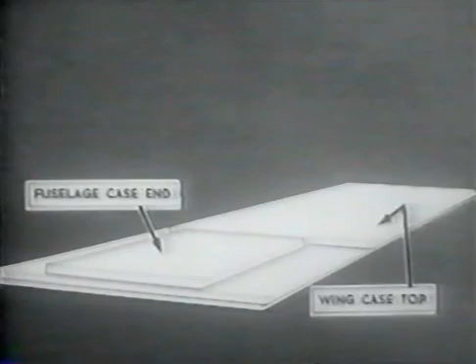The finished platform looks like this. And here it is in diagram. Let's see how it's built. Here are the two fuselage case sides nailed together to form the base of the platform. Now comes the end of the fuselage case and the top of the wing case. Then comes a side from the wing case. And on the same level, a fuselage end.

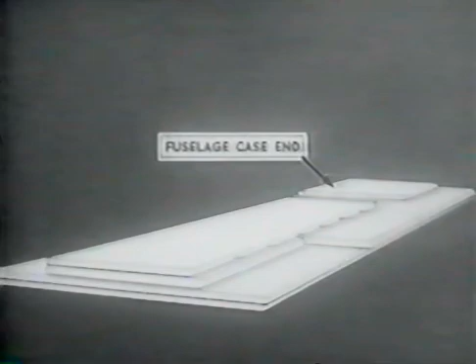The remaining wing case side and the two ends from the wing case are laid on top and nailed in place. This leaves a space toward the back of the platform, which is built up by nailing together three 2x4s taken from the wing case stringers and laying them lengthwise like this. The top of the fuselage case becomes the top layer of the platform. A diagram similar to this is reproduced in the instruction manual and should be followed in detail when the platform is being constructed.

At this point, the crew chief is ready to direct the transfer of the fuselage onto the platform. If the level of the trailer bearing the fuselage is higher than the platform you have built, wheel pits of sufficient depth should be dug to bring trailer and platform to very nearly the same level. The truck bearing the fuselage is slowly and carefully backed up, keeping it always in exact line with the platform.

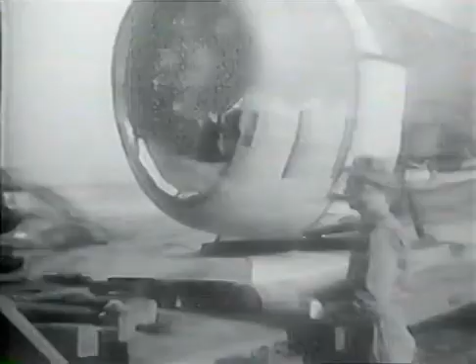The prime mover is disconnected. A tow line is fastened around the entire bottom of the fuselage case. And by using the prime mover, the bottom of the case with the fuselage itself is eased squarely off the trailer and onto the assembly platform. Steady. Steady there. Just a bit more. Pull it right to the edge.

Okay. Now, exactly at the back end of the shipping brace, the 10-inch section of floorboard is removed from the fuselage case bottom. Then a 10-inch section is cut out of the exposed 4x6 beams on each side. These cutaway sections, like the slot in the base of the platform, are important later in assembly.

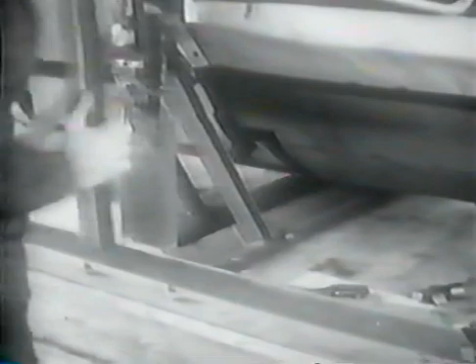It is also necessary that the rear members of the shipping brace be removed. These members have been bolted and lightly welded in place. The bolts are removed and the weld is broken. That concludes the construction work. The crew chief can now begin to direct the actual airplane assembly.

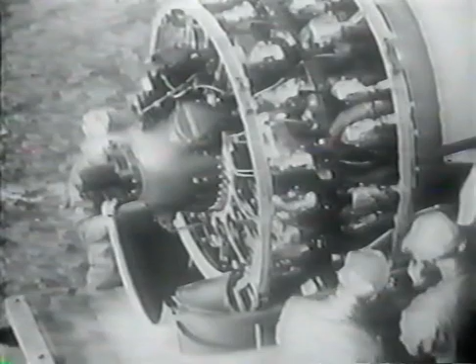First, the engine cowling is taken off. This goes quickly if at least 4 men are assigned to the job. Now the engine must be cleaned. Kerosene or other suitable solvent may be used in removing the anti-corrosion compound sprayed over the engine before shipment. The carburetor and lower cylinders should be drained of any oil or moisture which may have accumulated.

Also, the spark plugs and connecting harness must be installed. These procedures should be done in accordance with instructions found in Technical Order number 02-1-1. While this is being done, the protective tape and other coverings are taken off to expose all openings and fittings of the fuselage, wings, and all other parts. After complete inspection of the work that has been done on the engine, the cowling may be replaced.

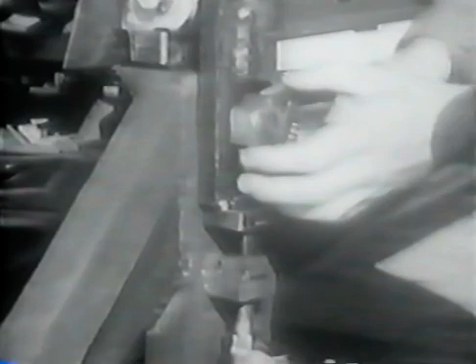During shipment, steel braces have supported the weight of the airplane. The braces are connected to these wing hinge or pin connections. The weight must be released and transferred to these steel resting pads. This is accomplished by turning up the jack screw just 2 or 3 turns. This is enough to relieve tension on the master bolt. Then, the master bolt, which has actually carried the full weight of the plane, can easily be removed.

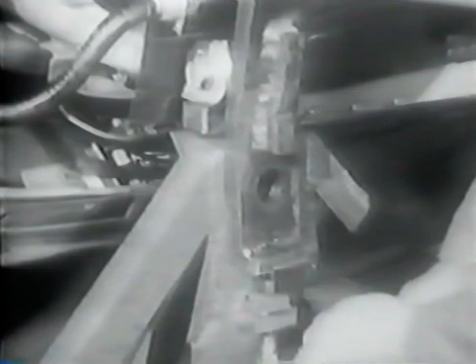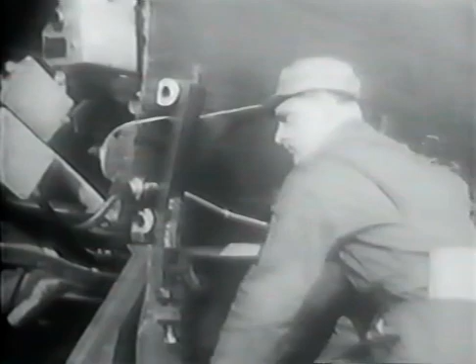The direction of the jack screw is then reversed. It is turned down until the weight settles on the steel resting pads. Now the hinge bracket may be removed. The hinge is then free and clear, and ready to receive the wing.

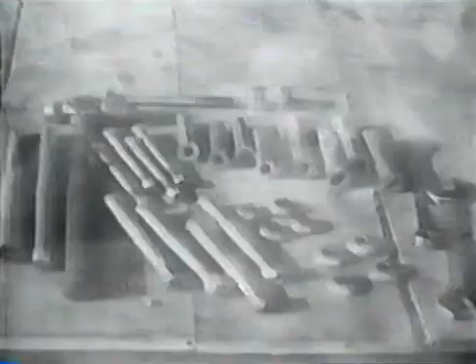To prepare for the wing assembly, we remove the pilot's seat to provide more working space in the cockpit. Now, caution. Both aileron control rods must be inserted now, flush with the fuselage. It will be too late after the wing is on. The crew chief checks to be sure that all wing connection drift pins, bushings, bolts, and tools are ready and on hand. When he's sure that everything is in its place, he can start to direct the actual wing assembly.

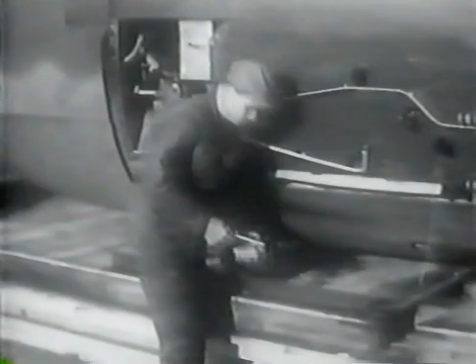Both upper and lower wing and fuselage hinges are secured in the same manner. They are lined up with the aid of drift pins. When the hinges are in perfect alignment, the bushings are installed, always with the split side upward. A bushing inserter is used to drive the bushings through the hinges. The drift pin is forced out as the bushing is driven home.

When all the bushings are in place, the men can ease off a few at a time so that the support they have been giving the wing will be released gradually. Next, the tapered bolts are inserted. The heads of these bolts should always be facing each other, pointing toward the inside of the wings.

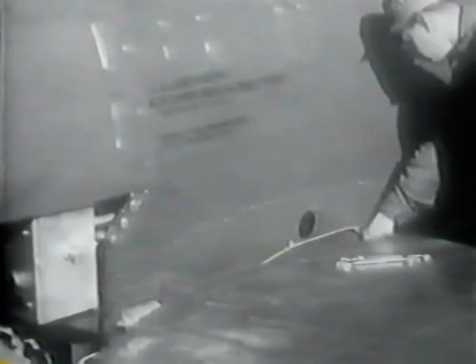Once both wings are on, we are ready to make all wing root connections, except for the cables and control rods. This requires a thorough understanding of the connections to be made and their location. Since these connections are in very tight quarters, let's look at an animated diagram.

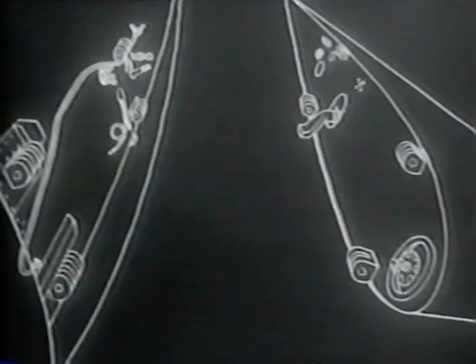Here are the connections to be made at the left wing root. The fuselage is here, and the wing root here. Here are the connections which are found in both wings. The flap hydraulic lines, the cannon plug, the aileron control rod, the landing gear and brake hydraulic lines, the uplock cables, and the gun heater tube.

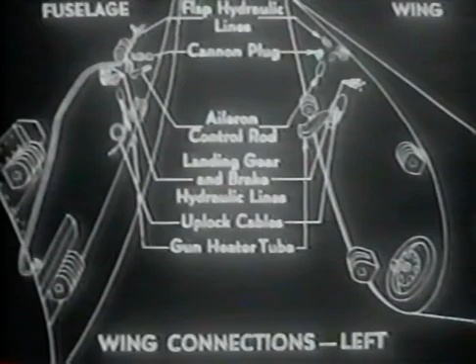Now let's see the connections found only at the left wing root. They are the aileron trim tab cables, the static and pitot airspeed lines, and the oxygen line. Here's the situation on the right wing. In addition to the connections you see here, which are common to both wings, we have the fuel vent and the cockpit air scoop.

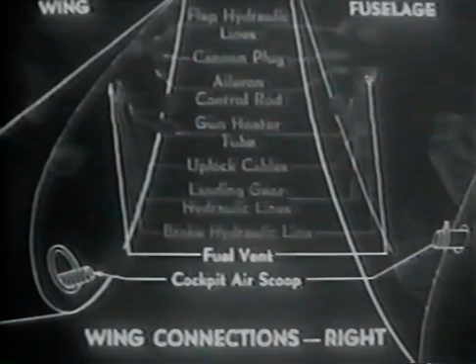Remember, at this point we make all connections except the control rod and cable connections, which should not be made until after the landing gear is down. In preparation for lowering the landing gear, a pit must be dug under each wing in line with the path that the wheels will take. This pit will have a maximum depth of about 1 foot at the point where the gear is fully extended.

To lower the gear, wires which were attached to the uplock cables for shipping purposes are pulled at the wing root. The gear will now extend. Here is the reason we cut out that section of the platform. It would have obstructed the passage of the wheel. Notice, too, that the pits are dug quite close to the platform.

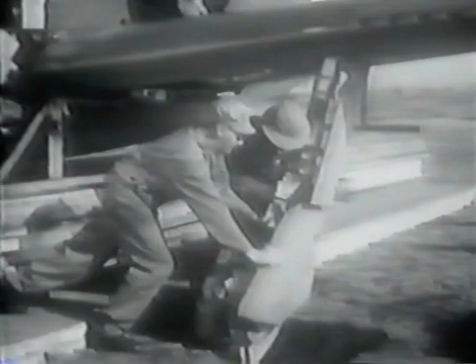In order to bring the gear down to the full downlock position, it is necessary for 2 men to get behind and push. When the downlock position is reached, an audible click is heard. With the necessary access holes now available, the uplock cables, the aileron control rods, and in the left wing, the aileron trim tab cables can be connected. Let's see what goes on inside that wing he's reaching into.

To connect the uplock cables, the ends of the cables from the fuselage are drawn into the wing. The short cable from the fuselage is connected to the long cable in the wing through this access hole. The long cable from the fuselage is connected to the short cable in the wing through this hole. These connections are made with the turnbuckles, which are drawn up to a tension of 25 to 30 pounds. On the back side of this spar is a micarta guide block, which we see here. The cables are threaded through this block.

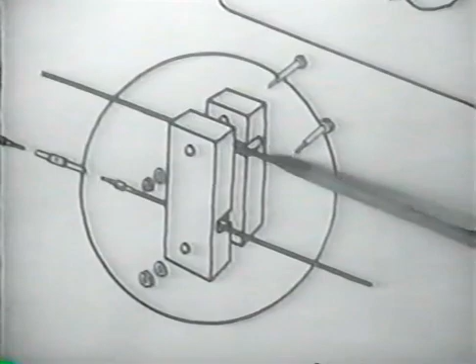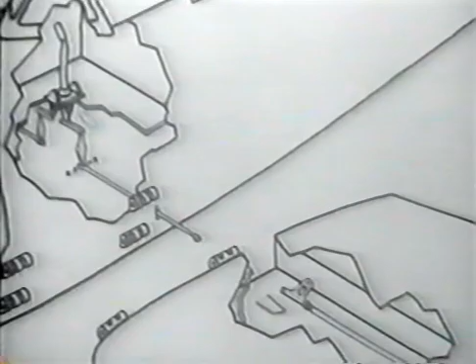Now, the aileron control rods. There's an access hole in the cockpit floor here. By reaching down through this hole, we can secure the rod with this bolt, washer, and elastic stop nut. In the wing, the same procedure is followed by reaching up through the access hole and making the bolt, washer, and nut connection. Here we see a closer view of both connections: the fuselage connection, and the wing connection.

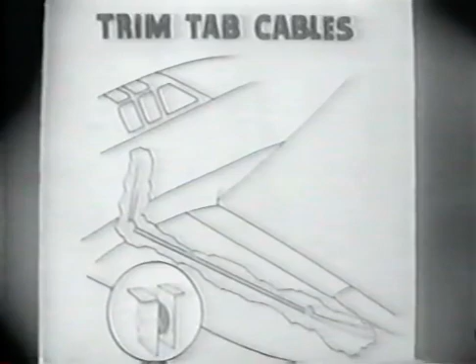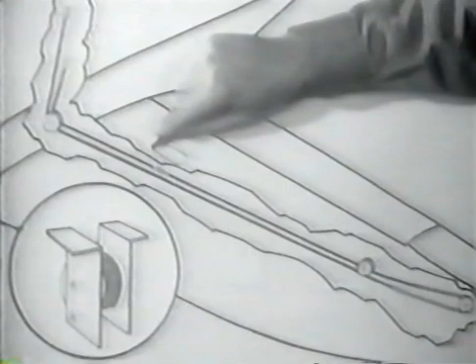The trim tab cables remain to be connected. Here is the left wing. Here are the cables running out through the wing. By reaching down through this access hole in the top of the wing, connection is made by means of a turnbuckle. Tracer wires attached to the ends of the cables aid in pulling the cables to the points of connection. The long cable, pulled through by tracer wire, is connected to the chain by reaching up through this access hole.

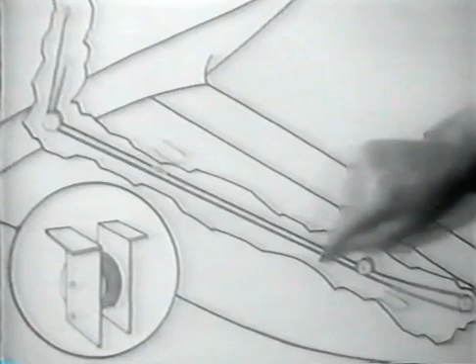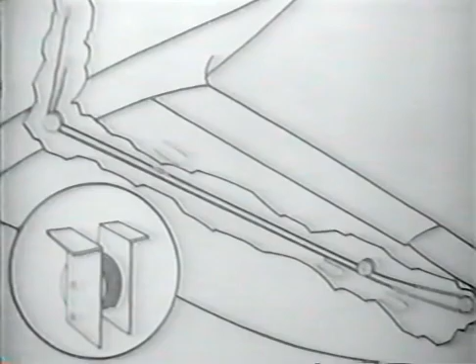At this opening, reach in and install the pulley guard with a clevis pin and cotter pin provided. Here is a closer view of the pulley guard, showing where the clevis pin is inserted. A safety wire, which has been fastened around the chain, is now removed, and the cable tension is adjusted to 35 pounds. With all wing connections now complete, the next step is to make preparations for checking out the operation of the landing gear.

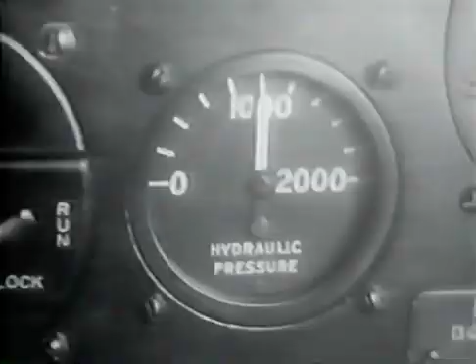First, we check the fluid in the hydraulic reservoir. Pressure is then built up in the hydraulic system by using the hand pump in the cockpit until the indicator shows 1,000 pounds. The flaps and brakes are now bled according to standard technical orders. 90 pounds pressure is pumped into the upper chambers of the shock struts, putting the gauge on the valve to the lower chambers.

Next, after making certain that all the switches in the cockpit are in the off position, the battery, which should be brought up to full charge, is installed. Then the crew chief is ready to direct the actual testing of the landing gear, which should be raised and lowered at least 3 times.

In the first retraction of the gear, the crew chief should check to see that the inner door and strut fairings fit smoothly in the wing.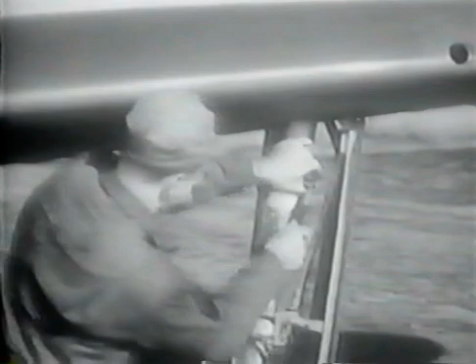We can get ready now to roll the plane off the platform. To do that, we must transfer the weight of the plane from the platform to the landing gear. First, the air must be released from the lower chambers of the shock struts. The landing gear must be fully compressed and held in this position while the pits are almost completely filled in and the earth packed hard under the wheels. Now the man in the cockpit should park the brakes.

The entire plane is then jacked up by pumping air into the lower chambers of the shock struts. To make the pumping job easier and to relieve strain on the pump, several men rock the plane by pushing up on the wing. The result is that the plane is lifted above the steel rest pads of the shipping brace.

Once the weight of the plane has been transferred to the landing gear, the two center skids behind the shipping case bracket are sawed through, and the front section of the fuselage platform with the supporting irons is pulled forward and clear. Now we are ready to release the tail from its shipping case brace. In preparation for this, air is pumped into the tail wheel strut until the piston is completely extended. The man in the cockpit locks the tail wheel to prevent it from turning sideways.

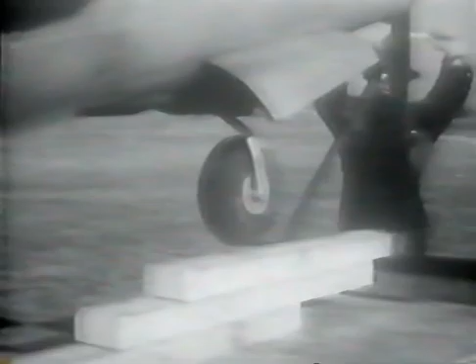We must build a track for the tail wheel to run on. To do this, we make use of one of the stringer sections formerly used to carry the wing. It is sawed into 3 equal lengths and laid directly under the tail wheel in the manner shown here. The other stringer section is placed under the empennage jack pad.

8 men now lift the tail slightly to ease the tension on the tail shipping brace bolt. When the bolt is removed, the tail is slowly lowered until the wheel rests on the tail track. The stringer we just used to lift the tail can now be sawed through the middle, and the 2 sections placed in front of the platform to form a tail wheel ramp.

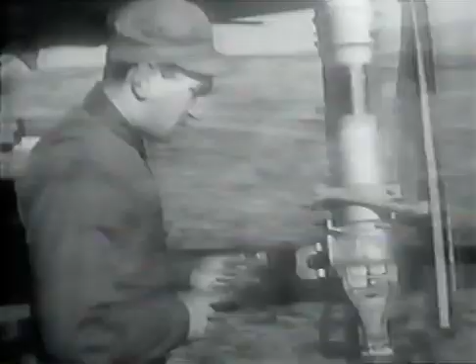The tow lines are made ready and fastened to the towing hole. Stop, not there. That's the uplock hook. Use the hole that's marked for towing.

A jeep is mighty handy in pulling the plane away from the platform, but manpower can do the job if necessary. The short sections of tail track are moved progressively as the tail wheel rolls forward. During this roll-away operation, the man in the cockpit keeps a slight tension on the brakes to ensure slow, even movement of the plane. Here she comes down the ramp, looking more like a P-47 every minute.

Now is the time for pre-flight adjustments and inspections of the landing gear shock struts. First, all of the air is released from the lower chambers to allow the strut pistons to be fully bottomed. Next, we remove the plug on the lower chamber to see if it contains the proper amount of fluid. If there is sufficient fluid in the cylinder, it will be found level with the plug opening.

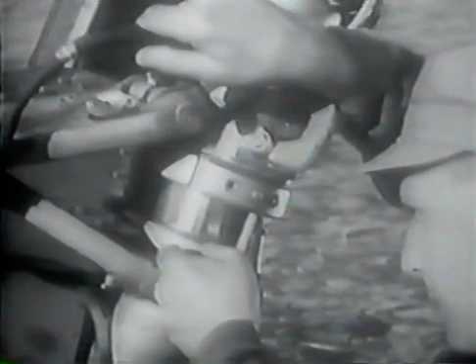Now the strut chambers are checked for proper pressures. 90 pounds is correct for the upper, and 360 pounds for the lower chambers. With these pressures, the clearance between the bottoms of the lower chambers and the ends of the pistons should be 1 5/8 inches. To make certain that there has been no leakage in the transfer valve, the gauge is put on the upper chamber and checked again to see if it reads 90 pounds.

We're moving right along now, and we're ready for installation of the tail feathers. The fin and horizontal stabilizer are treated as a sub-assembly, which is installed by means of 10 bolts here and here, and 4 bolts in the rear bulkhead here and here. When this is done, the crew will be ready to string the control surface cables. There can be no confusion in stringing these cables because before shipping, each cable has been tagged to show where it goes.

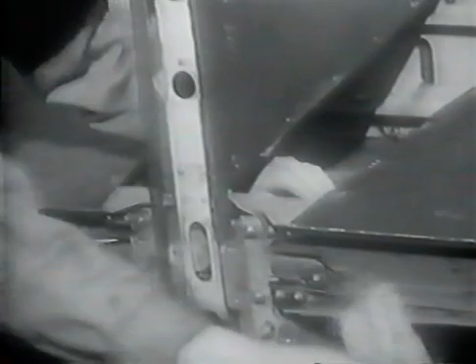After the cables have been strung, the pulleys are put in place. The elevator tab cables are connected, and the cover plates are put on. The same procedure is followed for the rudder trim tab cables. Now the trim box in the cockpit should be set in neutral.

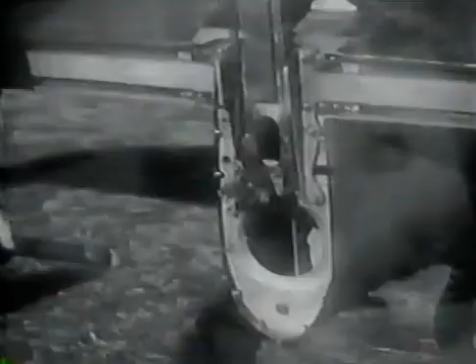The elevator control rod is placed in the tail and into position. The forward end is connected inside the fuselage. The elevator can now be installed. On each side, there are 2 stabilizer hinge fittings and 1 trim tab universal connection. The elevator control rod is connected to the elevator. The rudder is connected at the 2 pin hinges here and the rudder trim tab universal here.

The rudder cables are connected next. This can be done only after the man in the cockpit has put the control lock to on position in order to place the rudder in neutral. When all the cables, bonding, and rudder tail light have been properly connected and inspected by the crew chief, the assembly of the tail feathers is complete.

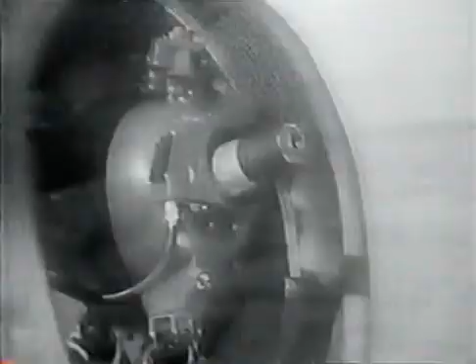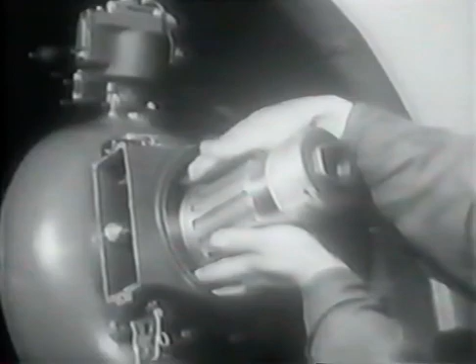The ship is now ready for the installation of the propeller. Here are the steps in preparing for propeller installation. The plane is nosed up to within about 2 feet of the platform, so the men will have something to stand on while they work. Your very first action is to remove this brush holder assembly, because the brushes would be snapped off if the propeller were put on with the brush holder in place. Out comes the inner cone. And don't forget the shim, which is right behind it.

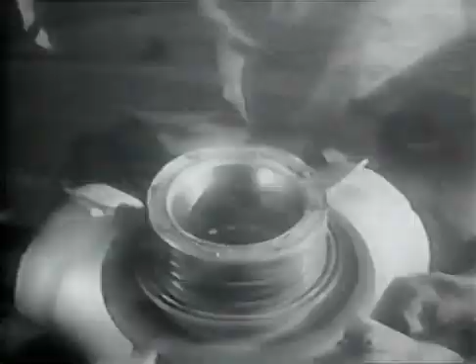The cone and shim must be thoroughly cleaned with a suitable solvent, and also the propeller shaft. The splines on the propeller shaft and also the cone and shim are then coated with a light oil. When this is done, the shim first and then the cone are replaced, making sure that the open portion of the cone is at the top. The propeller lock nut threads are coated with the prescribed mixture of castor oil and white lead. While the shaft is being made ready, the protective coating from the propeller itself can be removed. The splines on the inside of the propeller hub are cleaned and oiled, and the slip rings are wiped clean of any oil or dirt.

When both the shaft and the propeller are ready for assembly, the propeller is brought up to the plane. You need at least 10 men for this job. Under the guidance of the crew chief, the propeller is carefully placed on the shaft. The number 1 blade should be on top so that the splines will be readily engaged. Now the main propeller shaft nut is tightened with the 4-foot propeller bar. After the nut has been drawn tight, insert the locking sleeve and secure with the lock pin assembly.

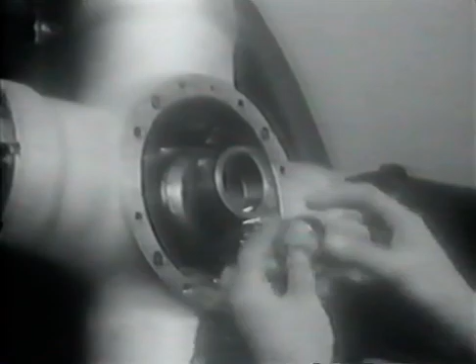Next, after cleaning, the brush assembly is put in place and the brushes checked for proper clearance on the slip rings using Prussian blue according to standard procedure. The propeller hub electric contact points are cleaned and made ready to receive the power unit. The power unit itself is removed from the case and cleaned with particular attention to cleaning around the contact points. Since the power unit is set in low pitch when packed, the blades on the propeller must be set in low pitch also.

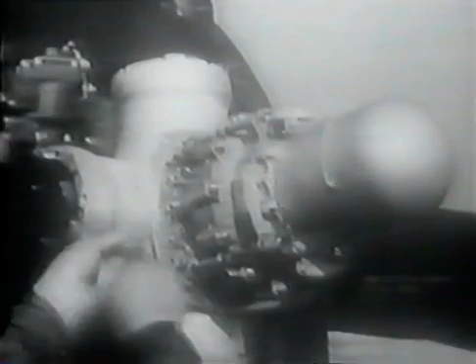When the power unit is installed, the 8 bolts are drawn up and secured with safety wire. The propeller gear housing is then greased and the speed-reducing gear housing is oiled. With the power unit cover or spinner installed, the propeller assembly is complete.

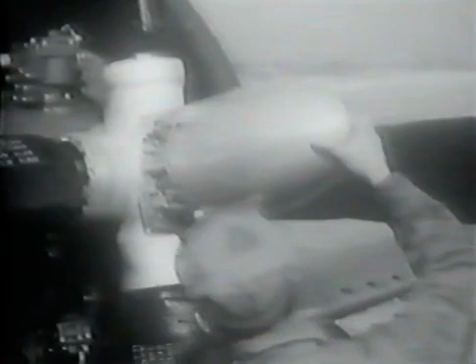Now, all of the major connections on the airplane have been made. After a thorough inspection by the crew chief, we install the fillets and secondary cowling. The pilot seat is returned to its place in the cockpit. And when the pitot tube, antenna wires, radio mast, and pilot's rear view mirror have been installed, the armorers are ready to take over, to install the guns and charge them.

The job of assembly is done. The plane is towed off to the airfield runway. Here, after the plane has been fueled, the crew chief runs up the engine and makes one final check on the operation of all instruments and movable surfaces.

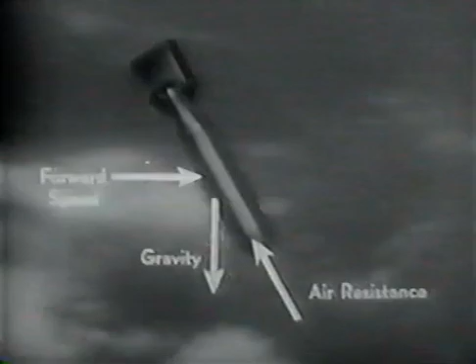These three major factors working together, forward speed, gravity, and air resistance, make it necessary to correct the aim to hit the target in range. So, in horizontal bombing, we must allow for the pull of gravity on the bomb, the speed of the airplane, and the effect of air resistance in finding the proper position for the release of the bomb. If we release too soon, our bombs will undershoot the target.

If we release too late, our bombs will overshoot the target. If we release at the right time, we hit the target. So far, we've been considering an airplane in level flight. Now let's put the airplane in a vertical dive over the target and see what happens.

The speed of the airplane, the pull of gravity, and air resistance are now working in the same direction. So, by aiming the airplane at the target, we have eliminated any need for correcting the range. The bomb will hit where we aim, whether we release early or late. This ability to hit by flying the airplane at the target and releasing the bomb whenever our aim is on is the foundation for dive bombing.

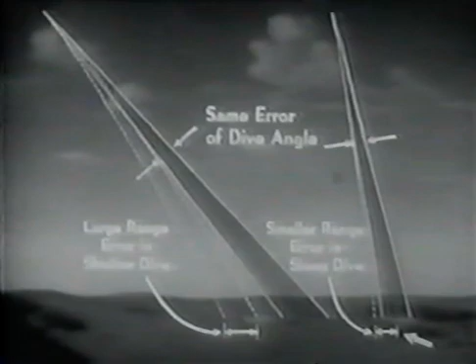Furthermore, the same amount of error in estimating our dive angle will cause a greater range error in a shallow dive than in a steep dive. In a shallow dive, the bomb falls much farther from our point of aim than it does in a steep dive. Estimating this range correction introduces an error. We have only the size of the target to help us estimate our corrections. In making large corrections, this leads to error. It is also much harder to estimate the dive angle of a shallow dive correctly, so that our expected error is still greater.

Let's make a dive on a windless day. If we reach release altitude at a normal dive angle with our line of sight on the target, the bomb will hit the target. Gravity causes the bomb to land short of the line of flight. The sight is bore-sighted, so the line of sight is below the line of flight. If this is done, the bomb will hit our point of aim when we release in a normal dive.

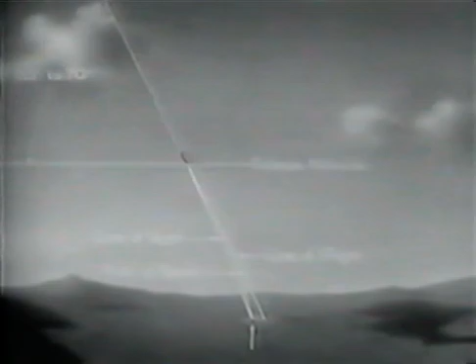If, however, we're diving the airplane toward the target and find that we're too shallow, we must change our line of flight or the bomb will fall short of the target. Of course, on nearing release altitude, we can pull up the nose, raising our line of flight. This corrects our bomb toward the target. But it does not change our vertical angle with respect to the target, as we change the line of flight almost instantly when we pull up the nose. This correction changes the bomb's path because the bomb is affected by the airplane motion, which is along the line of flight.

The bomb lands far short of our line of flight and the line of sight because of the large effect of gravity in a shallow dive. The range correction is so large that it cannot be estimated accurately. Let's see what happens if we steepen the same dive to the normal dive angle as soon as we see we're too shallow.

Now, although the bomb will land on the line of sight, it is far short of the target. As before, we can pull up the nose, raising our line of flight and line of sight over the target to correct for range. But now our vertical angle from the target is even less than before, and our range correction is still larger. We are worse off than we were to begin with.

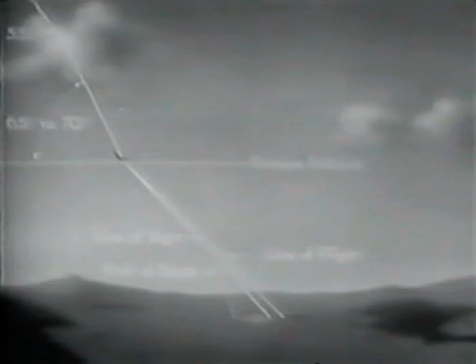Let's repeat the same dive and try to correct it once more. This time, we'll pull the nose up whenever we see we're too shallow. If we release our bomb with no correction, it would land even further short of both the line of flight and line of sight than it did in our original dive.

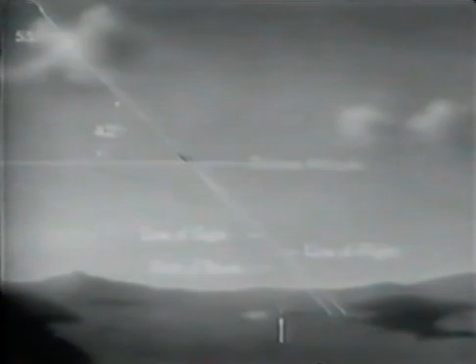But by diving shallower, we have raised our line of flight far over the target, so that the bomb will land over the target even though it's further short of the line of sight. However, our vertical angle from the target is now correct, and as we near release altitude, we correct our line of flight by pushing the nose over and putting our point of aim on the target. This correction puts us in a normal dive so that the bomb will land on the point of aim.

So, if we start a dive incorrectly, we can still release in a normal dive. If we find ourselves in a dive that's too shallow, we should raise the nose, steepening the vertical angle from the target in order to reach release altitude near the normal dive angle. The bomb will land so near the point of aim that range correction is easy to estimate.

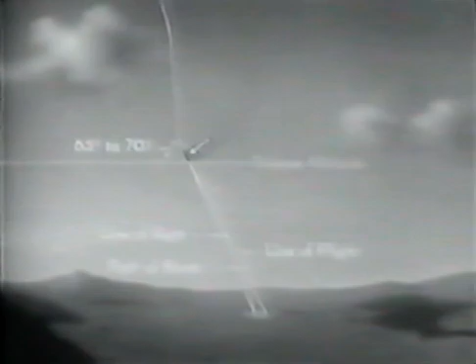On the other hand, if we find ourselves in a dive that's too steep, we should push the nose over to correct the vertical angle from the target and again reach release altitude so that when we make our range correction, we are in a normal dive.

Now that we've considered the problems of range, let's consider the problem of deflection. We must keep the bomb from falling to either side of the target, as seen by the pilot. We correct for deflection by turning the airplane right or left toward the target, because we must correct the line of flight of the airplane. Assume that the airplane is in a shallow dive. A small amount of turn will correct a large error in deflection.

Now let's aim the airplane at the ground in a steep dive. We see that to make even a small correction in deflection, the airplane must be rotated almost 90 degrees. Turning an airplane in a steep dive is difficult. If we apply much rudder in a steep dive, the airplane skids instead of turning.

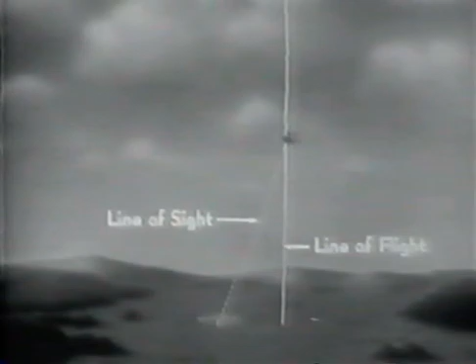A skid like this may skid the airplane just enough to point the line of sight directly on the point of aim. Because we can hold the line of sight on the point of aim, we get the false impression that the airplane is diving toward the point of aim. This is an illusion, because even the heaviest skid gives the airplane very little horizontal motion in a dive. Because of this, it's important for us to remember that in a steep dive, we turn the airplane with much more aileron than rudder, like this.

We have seen that it's easier to correct for range in a steep dive and for deflection in a shallow dive. We can't do both at the same time. The only thing we can do is compromise and make our dive somewhere between the steep and the shallow dive. Such a compromised dive is called the normal dive, in which we release our bomb in a dive angle of about 65 degrees. The normal dive starts shallow enough so that deflection can be corrected with a relatively small turn.

The normal dive angle ends steeply enough so that corrections for range are easily estimated. Experience has shown that a dive near this angle is best for bombing targets when we have to concentrate on both range and deflection.

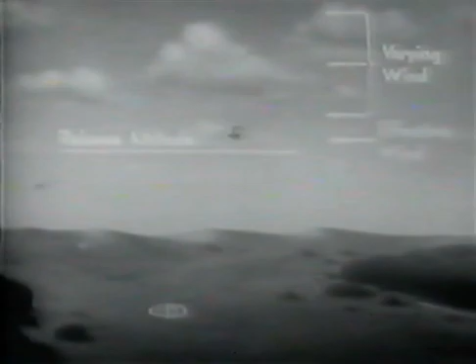Therefore, we must allow for the drift of the airplane before release altitude, plus the drift of the bomb after release, in order to make a hit. If the wind with which we're drifting during the dive remains constant, it is the effective wind. If the wind with which we're drifting during the dive varies, the wind drifting us at release altitude is the effective wind, since this is the wind drifting the bomb as it falls. We'll see in a later film that the wind about 500 feet above release altitude is the effective wind.

With knowledge of the effective wind, the wind affecting the airplane at release altitude, we'll be able to select our tentative point of aim on a stationary target far enough upwind from the target to allow for the bomb's drift after release. We must also allow for the drift during the dive. If we fail to allow for this drift, we must continually turn to keep on the tentative point of aim. In moderate winds, the turn is so sharp that it becomes difficult. In strong winds, it's impossible.

So we select a pushover aiming area far enough up the winds through which we dive to allow for the drift to the tentative point of aim. We push over on that area. As we dive, the moving point of aim travels toward the tentative point of aim. We can easily make small corrections in our dive up to the point of release. So by the time we reach release altitude, we should be aimed in deflection at the tentative point of aim. Just before reaching release altitude, we go to our sight and correct our aim in range. This final correction gives us our release point of aim.

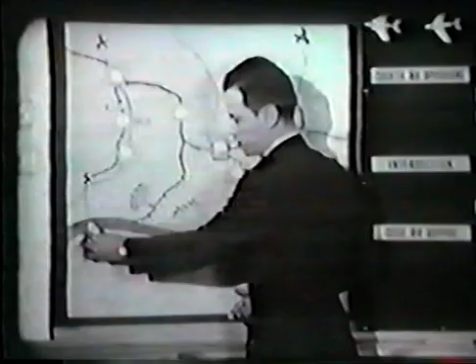Sir, I'm Major McManus. With the detailed coordination required in close air support operations, how is the ground fire coordinated with the airstrike? A good question. Close air support strikes are performed under the direction of a forward air controller. He observes the strike from his position in the front line area. This man has communication with both the flight leader and the fire support coordination center.

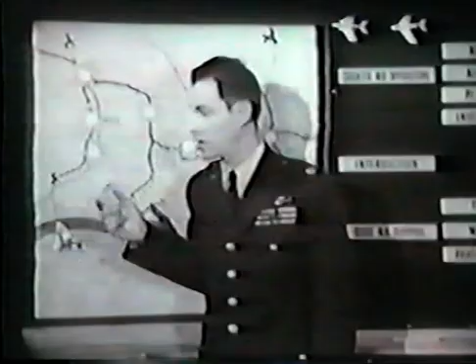He is responsible for the coordination of the air attack with ground fire, to include directing simultaneous air and ground fire against selected enemy targets. This officer is an experienced fighter-bomber pilot who is selected for his experience in close air support to represent the Tactical Air Force commander. Again, gentlemen, when you are assigned to your combat wings, these are the tasks you will be called upon to perform: counter-air operations, interdiction, and close air support. Now there are a couple of topics that I would like to review with you once more.

Three months later, replacements arrive in the combat zone for the fighter-bomber unit. The mission of the fighter-bomber is to attack and destroy enemy air and surface forces, transportation systems and installations, and when required, conduct such operations in close coordination with friendly ground forces.

The day fighters receive replacement pilots. The mission of the day fighter is to visually intercept and destroy enemy aircraft in the air and to provide fighter protection for friendly air and surface forces against enemy aerial attack. Those are the missions of the fighter-bombers and day fighters. Now let us see how they operate in combat.

Preparation for the daily activity of a fighter-bomber or day fighter group in combat begins the night before. That is when operations orders from Tactical Air Force Headquarters arrive at the day fighter and fighter-bomber bases. The operations order for this particular fighter-bomber wing directs counter-air, interdiction, and close air support missions in conjunction with a planned breakthrough by friendly ground forces. All squadrons are involved. The first step is to prepare detailed plans for the day's operations, such as mission assignments to each squadron, briefing times, aircraft required, and ordnance loads.

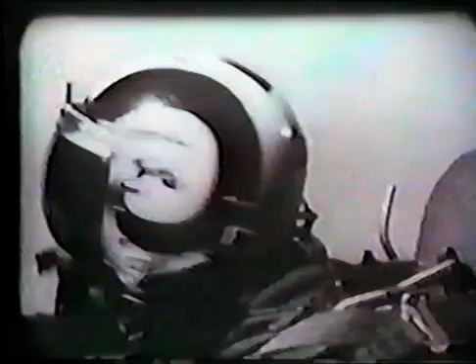The day fighters continue to sweep the area throughout the fighter-bomber strike. The fighter-bombers begin letdown and position themselves for attack.

Robust Red Leader going in.

Bursts from the guns on the way in may help to discourage the flak battery.

Red Leader here. Rocket switches, Robust. There's some aircraft in those two big hangars. Red Leader here. Last pass, Robust. Grundy Leader, this is Robust. Off the target. Set course for home. Roger, Robust. Grundy Leader here.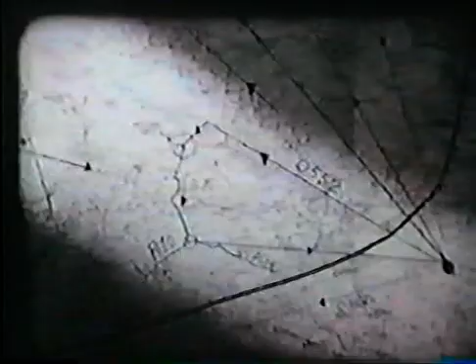Having completed their attack, these aircraft will perform armed reconnaissance from target south to Purple 10 on the enemy's main supply route. Armed reconnaissance is accomplished by seeking targets of opportunity along a predetermined route or in a designated area. In this phase, the fighter-bomber pilot is both hunter and killer.

Cherokee, Red Leader from Red 2. I think I've got a couple of trucks spotted. Pass at him and I'll follow you.

The objective of close air support operations is to assist surface forces by aerial delivery of firepower against hostile surface targets in the immediate battle area. Aircraft are dispatched for a close air support mission in red sector: ordnance load, napalm, rockets, and guns.

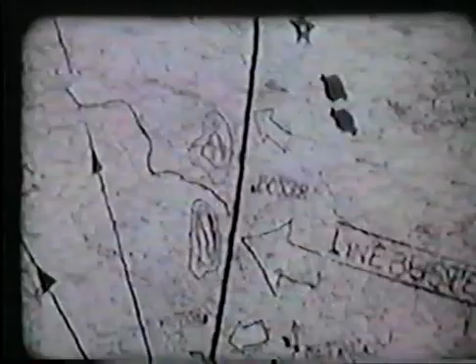8 aircraft have been retained on ground alert in anticipation of a requirement for immediate close air support of an Armored Division offensive operation Linebuster. Throughout the mission, this flight will also be under the direction of the Tactical Air Control System.

In the target area, close air support missions such as this are conducted under the visual control of a forward air controller. As pointed out earlier, the forward air controller is a combat-experienced fighter-bomber pilot, selected for his experience in close air support. He represents the Tactical Air Force Commander.

Golf Ball, this is Robust X-ray over Point Boxer. Do you have me in sight? Roger, Robust X-ray. This is Golf Ball. I have you. How do you read me? Robust X-ray to Golf Ball. We read you loud and clear. Over. Robust X-ray, begin an orbit to the left. Your target is a heavily fortified artillery position west of the lower ridge line, 4,000 yards forward of our nearest friendlies. Roger, Golf Ball. We have it.

Mark the target. Marking round is on the way. Splash. Do you see the burst of white smoke just east of your ridge line? We've got it, Golf Ball. Your target will be about 500 yards west of the ridge. Can you see it? Roger, I've got it. X-ray flight, roger if you have the target. X-ray rolling in.

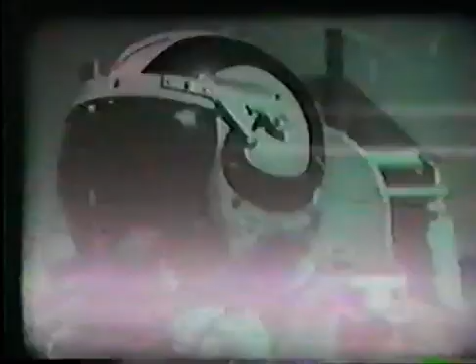Fistfight from Echo. Vector 300. Roger, Echo, 300. This is Echo here. Vector 280, 60 miles. Roger, 280, 60 miles. Echo to Fistfight. Vector 240. Bogies at 2 o'clock, 12 miles. Fistfight leader from 3. 4 bogies at 2 o'clock low. Roger, 3. Echo from Fistfight. We've got him in sight. Clean him up, Fistfight.

Hang on, 2. Fistfight leader here. Watch him, boy. He's coming around on you. Suck it in. Okay, keep turning. I got him. No sweat. I'm clear, Red 2. You're clear, Red Leader.

Let's go home, Fistfight. Fuel is a critical factor in jet aircraft operations. Flights returning from combat missions are usually low on fuel and must perform precise navigation and cruise control. Fistfight leader here. Back to 91%.

Formations returning from a mission normally check out with the agencies they have worked with, giving spot reports on the results of missions or on new targets in enemy territory. Echo from Fistfight, we got 1 kill, 1 damaged. Other 2 headed north. Outbound with 4. As the day progresses, mission after mission is checked off the board. Flight after flight comes in.

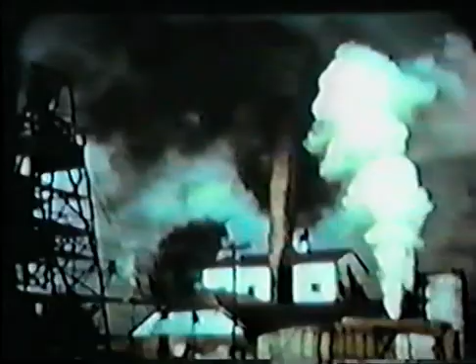General Eisenhower has put it this way. Our national structure is composed of extremely specialized elements whose continued operation is dependent on the efficient functioning of all other elements. Even a minor panic or local paralysis is a serious matter. Many million urban dwellers who raise none of their own food would starve within weeks if the transport system were broken.

Heavy industry would shut down if Pittsburgh, Birmingham, and the Gary areas were destroyed. Our national life would be crippled if Washington, New York, and a few other centers were subjected to sudden attack. We could scarcely carry on if bacteria should destroy the grain crop of a single year.

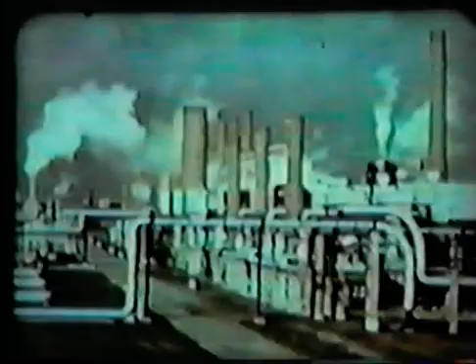Yes, the ability of any nation to wage modern war depends on the complex interrelationship of its component parts, its natural resources, its industry, its transportation, its public utilities, its network of communications, and its manpower. Each of these is dependent on the other. Stop the functioning of one of them, and the others will begin to wither and die for lack of nourishment.

Imagine, if you will, an extreme example of this principle. It is conceivable that the entire supply of a nation's oil resources and storage facilities might be located in 2 or 3 centers. Oil and its byproducts are essential to the efficient functioning of virtually every piece of mechanized equipment used in warfare, as well as many vital elements in the civilian economy. The destruction of these few production centers would effectively cripple that nation's ability to wage modern war.

You would defeat that nation with a few decisive blows, just as surely as if you destroyed its armies in the field. That is strategic attack.

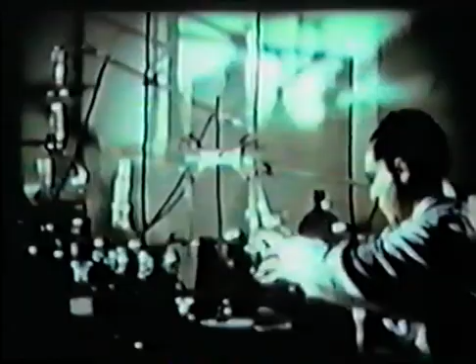Fortunately, as the war clouds gathered, our military planners were engaged in the task of piecing together the true picture of Japan's military strength. The assembling of such a picture, from bits and pieces of information gathered from 1,000 varied sources, is the job of our intelligence system. Not many beautiful, mysterious, secret agents of old-time warfare. Much more likely, a worried scientist or technician with tired eyes.

He's less interested in the secret plans of the enemy's fortifications than he is in determining how many electric generators they can afford to lose and still be able to fight a war. He's looking for soft spots in the enemy's industrial system. A slight shortage of manganese, or chrome, or kilowatts can mean more to him than a dozen divisions on the march. If the nation's steel supply is cut off from behind, those divisions won't march far or for long.

What, then, was the real nature of Japan? Let us analyze what was going on behind the silken curtain. First to be considered about Japan was its position as an island empire. Important because the Japanese were obliged to import almost all their raw materials to feed their war economy, a serious weakness in time of war. It gave them extended lines of supply that had to be protected. It gave us a first-class strategic target. That was only the beginning.

Japan entered the war with 6 million tons of shipping. She added 4 million to this during the war, some of it from owners who entered the Japanese co-prosperity sphere, dead or alive. The Japanese army at its peak totaled about 5.5 million. A well-armed force, skillfully trained and seasoned through years of combat with the Chinese. Japan's navy was third largest in the world. She began the war with 381 warships and built 816 more. 2 were battleships, bigger and more powerful than those of any other nation.

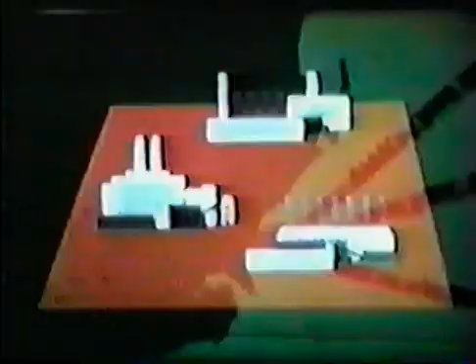But strategic targets alone are not enough. There's another essential element in waging strategic warfare. You must have strategic weapons, not the commonplace weapons of old-fashioned warfare, but weapons that meet 4 rigid specifications. 1, they must have sufficient range to launch an attack on the enemy from available bases. 2, they must be capable of penetrating any and all enemy opposition organized to defend the targets upon which his war economy is based. 3, they must deliver to the target sufficient firepower, bombs, to destroy those targets. 4, they must be available in sufficient numbers to sustain the attack and make recuperation impossible.

It was the acceptance of its design that signified a realization of the true meaning of strategic air power. But it takes time to build the weapons of strategic warfare. It took a long time to design, build, and deploy for combat the first B-29. It took 8 years. The war was 2.5 years old before the first units were ready to strike the Japanese homeland, and over 3 years old before the 20th Air Force had adequate bases from which it could unleash the full fury of its power.

The question of what to do with our strategic air weapon once we had it was decided upon by the Joint Chiefs of Staff in Washington. Based on detailed information supplied by military intelligence, it was up to them to decide which of the strategic target systems should be attacked and in what sequence in order to secure the greatest cumulative effect on the overall economy. Should we strike the Japanese airframe industry first, or the aircraft engine industry? Should we direct our strategic air force against the coke, iron and steel industry, or petroleum? Should we disrupt their rail communications, destroy their shipbuilding industry, or level their cities?

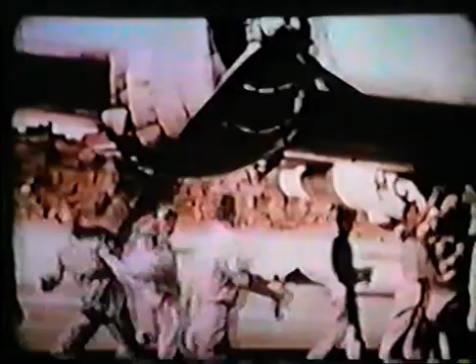This is Air Force 1944 model. By no means new technological warfare, but a forerunner of what the future portends. Watch these instruments of a past war in action.

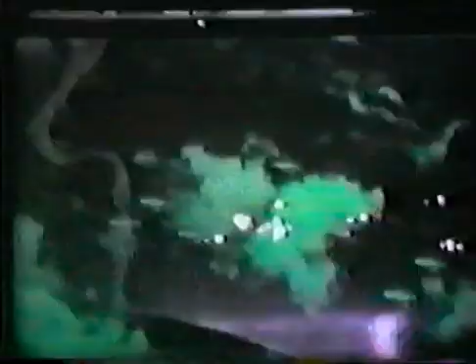In accordance with the Joint Chiefs of Staff directive, the Japanese aircraft engine industry was selected as the target for the first mission of the 20th Air Force operating from the Marianas. On the 24th of November 1944, 58 tons of bombs were dropped on the Nakajima factory near Tokyo, 2,800 round-trip miles from base. The crash of these bombs marked the opening of our unparalleled air offensive.

Day after day, week after week, month after month, the attacks continued and gained momentum. Now the target was the Japanese aircraft industry. Now the large urban areas. Now the oil industry. Then Army and Navy arsenals. The chemical industries, aluminum processing, railroad installations. One strategic target group after the other. All with one single objective: to destroy the enemy's capacity to carry on the war.

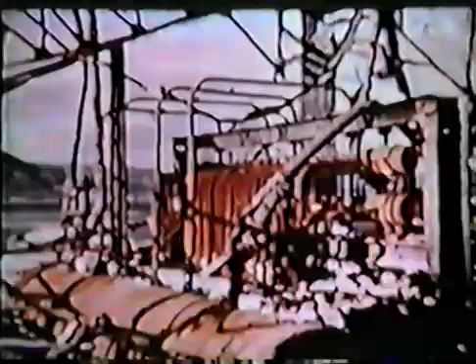So desperate was Japan's oil situation that in 1945, pilot training was progressively reduced until it reached a level of less than half of the barest minimum number of hours needed to teach a man to fly. Remnants of the once powerful Japanese fleet were in port, immobilized, and later destroyed at their moorings.

The period of air attacks on Japan proper saw Army and Navy ordnance plunge to disastrous levels. In less than a year, production in the arsenals of Japan was cut in half. The shortage of steel was so acute that Army chiefs in the field had been told that heavy artillery manufacture was being discontinued. An order had been issued